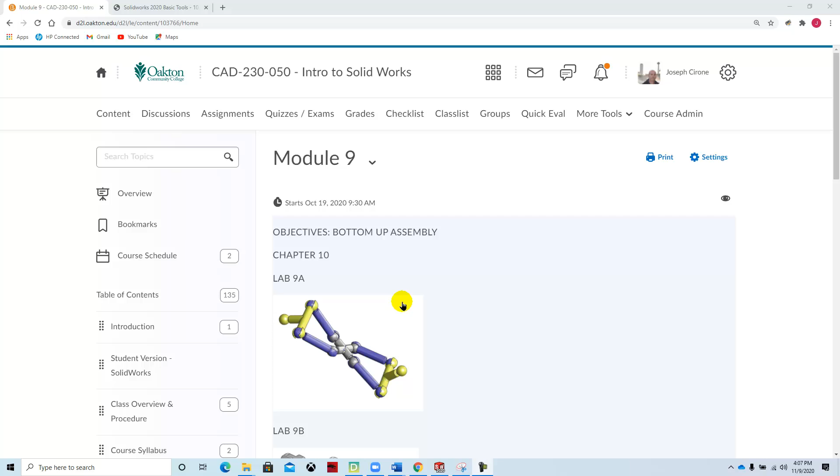If we look at the curriculum, if you want to get that from the book, you can go to the 2020 Basic Tools book, Chapter 10, Bottom-Up Assembly. I've already downloaded the file, so we can take a look at it right here.

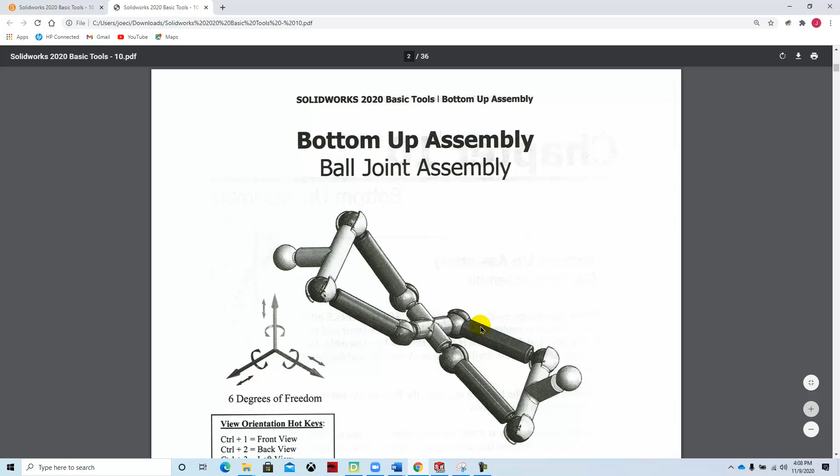Tools needed: we're going to use mates. Mates you can kind of think of as glue, and mates allow us to glue these different pieces together. What mates do is they allow certain movements or certain degrees of freedom. As we start to put things together, we can look at how the parts should move and apply these different mates so that they move within the boundaries of these different degrees of freedom.

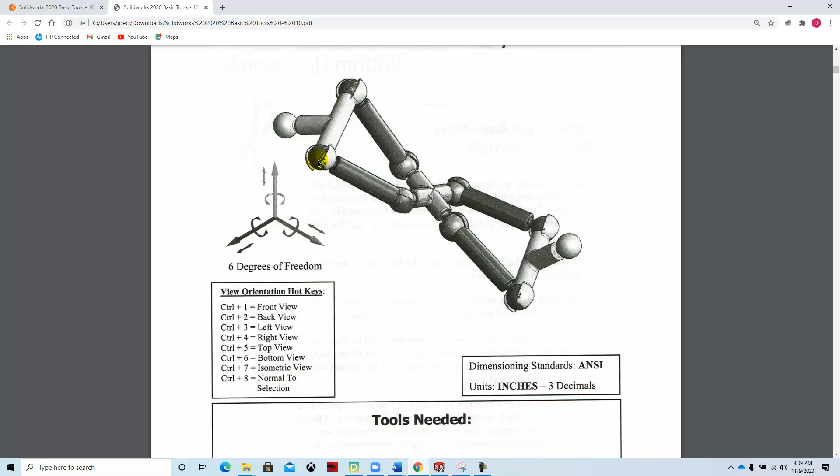Essentially what we do when we mate them is we take away some of their freedom so that they can only move, say for this part, concentric about these spherical shapes.

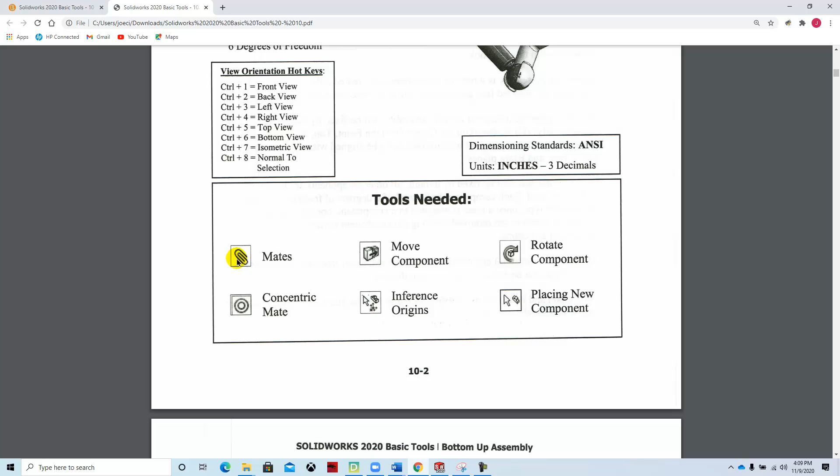This will be an inch or an imperial assembly drawing. Tools needed: we'll use mates, move component, rotate component, place new component, inference origins, and concentric mates.

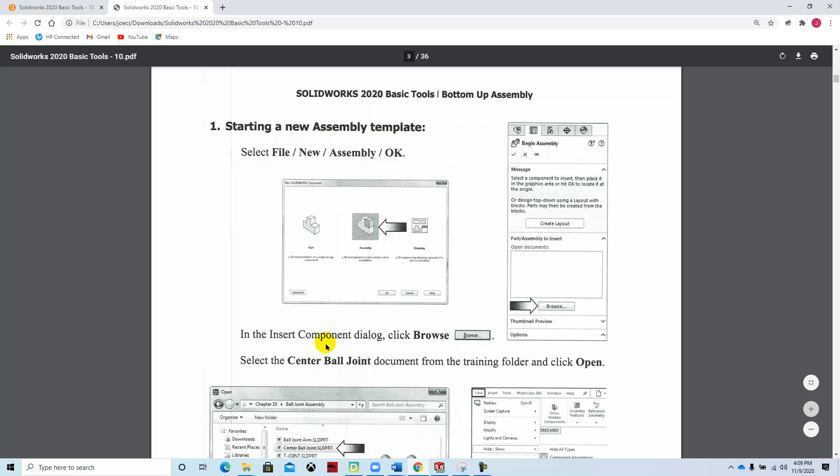Starting a new drawing, starting a new assembly. So what we'll do is we'll go ahead, start a new assembly, and then we'll browse for the parts. Now you should have the parts from the previous chapter. I'll take a look and double check on that. If there are any parts in this module that aren't, I will put them in the D2L course shell in the contents section for this.

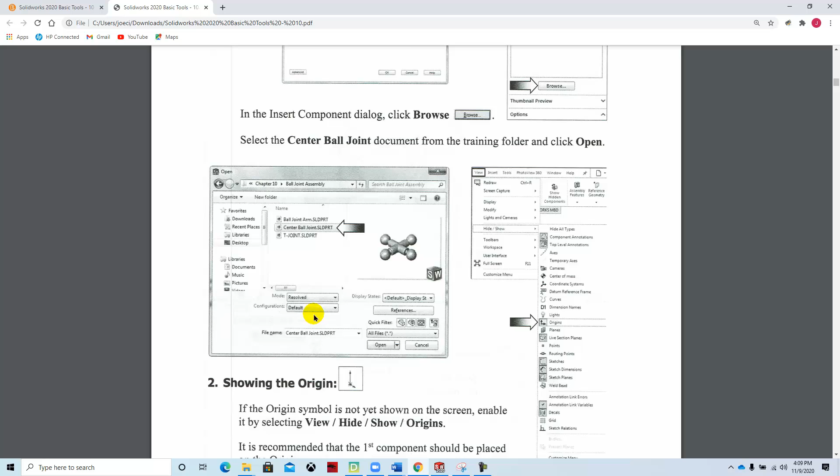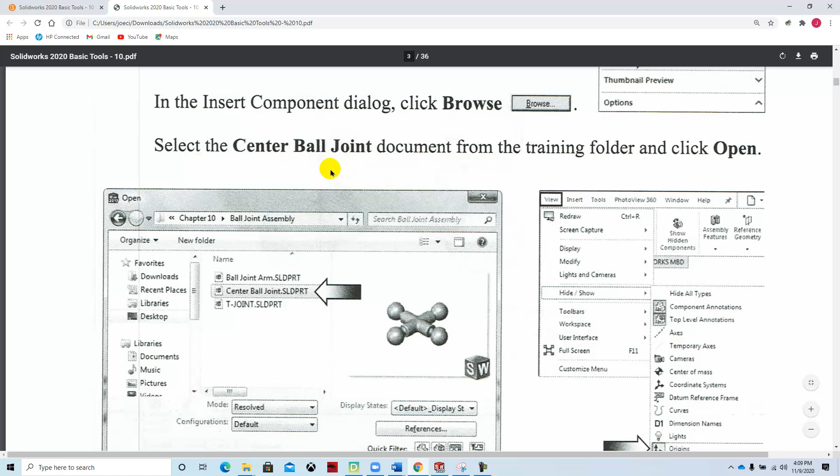So we're going to start off by creating a new assembly, and then we're going to insert this center ball joint. After we insert that, what we're going to do is we're going to display the origin.

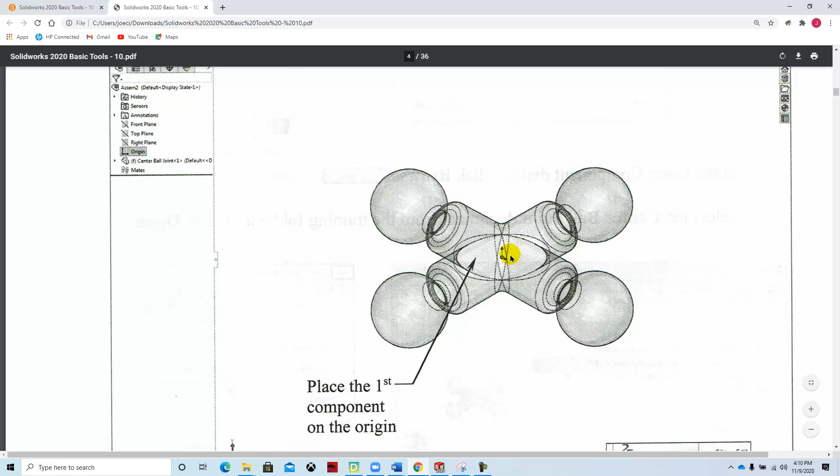What will happen is when we place the first component, it's fixed, meaning it doesn't move, and so there will be a letter F next to that component. So the first part that you put into the assembly is important, and the orientation of that part is also important. So let's get started.

Here's what the assembly will look like. I just did a little bit of practice work on it. Depending on how you move these different components depends on how you've constrained those different parts.

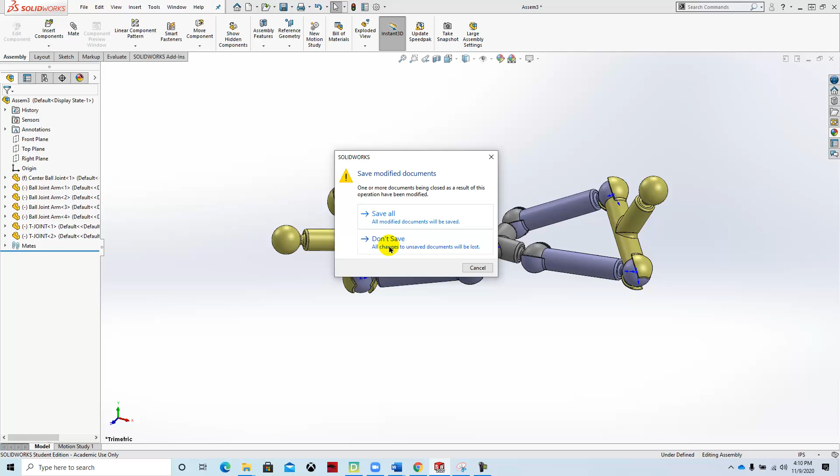I'm not going to save this, just going to bail out of it. And we're going to start a new one. New assembly, okay.

Now it wants to know—it went right into the insert components area, and so it wants us to insert the first component, which will be this center ball. You can browse for it from when you previously did this.

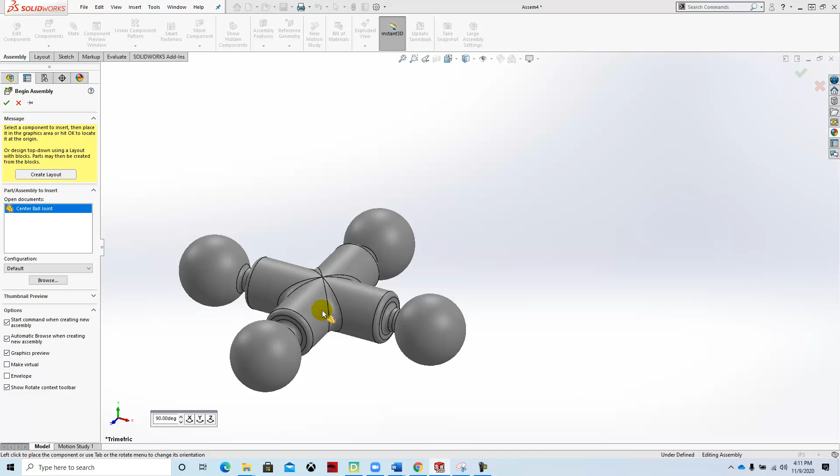And then what it's saying is go ahead and show the origin. It would automatically go to the origin, but the origin is not displayed. So what we can do is go to View, Hide Show, Origins, and this is where zero is. And then when we click here, you'll see that the center of this part is now at the origin.

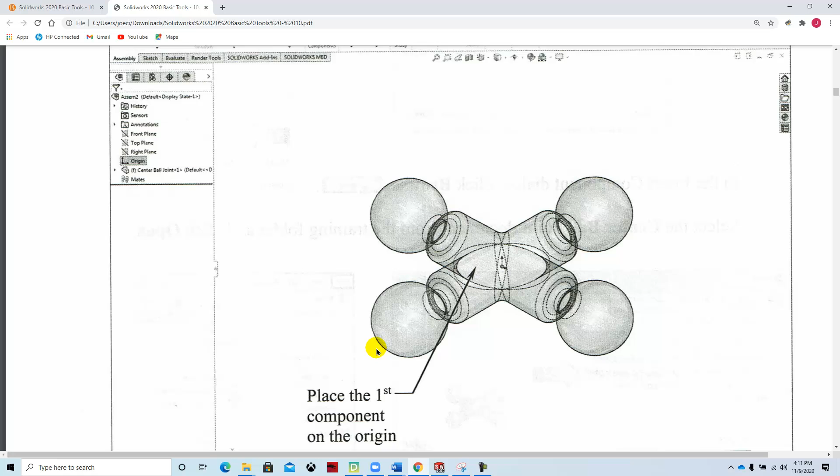And it's fixed. So if we look at the fixed part, we'll see that there's an F next to it.

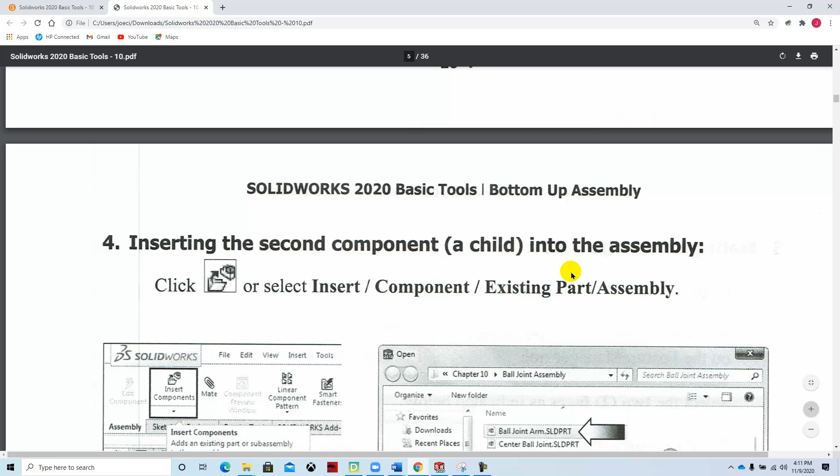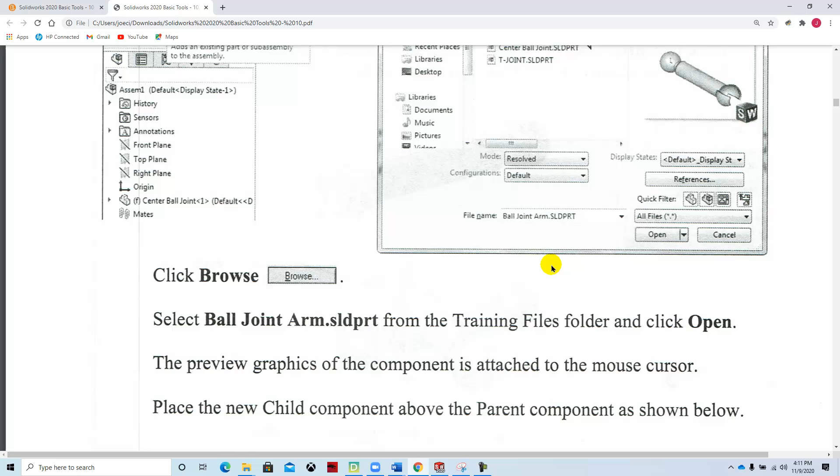We're going to insert the second component, and this is what's known as a parent-child relationship. The first part that's inserted is the parent, and then all the remaining are their children. We'll bring in the ball joint arm, and we could bring in more than one at a time, but the way the book goes through it has you bring one in and mate it. And think of mates kind of as glue.

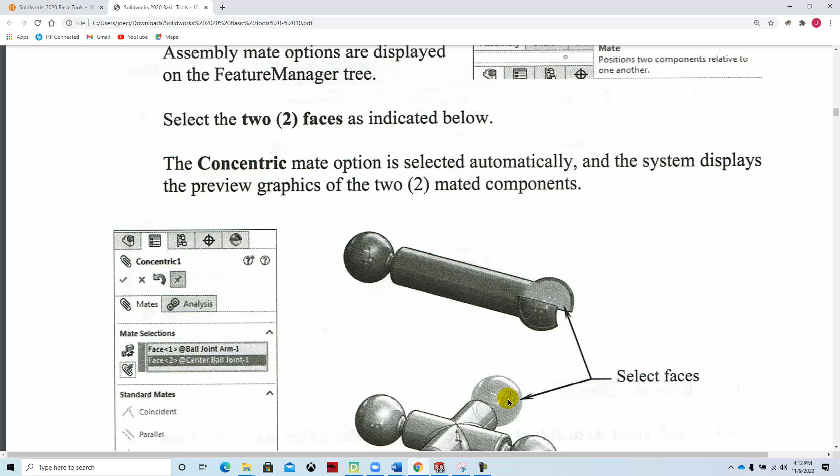And so we'll bring in this part, and then we'll hit the paper clip, and we'll select the inside face, and we'll select the face. And then Solidworks is pretty smart—it'll recommend a concentric mate because it knows there's two spherical faces, and those two mates would work together.

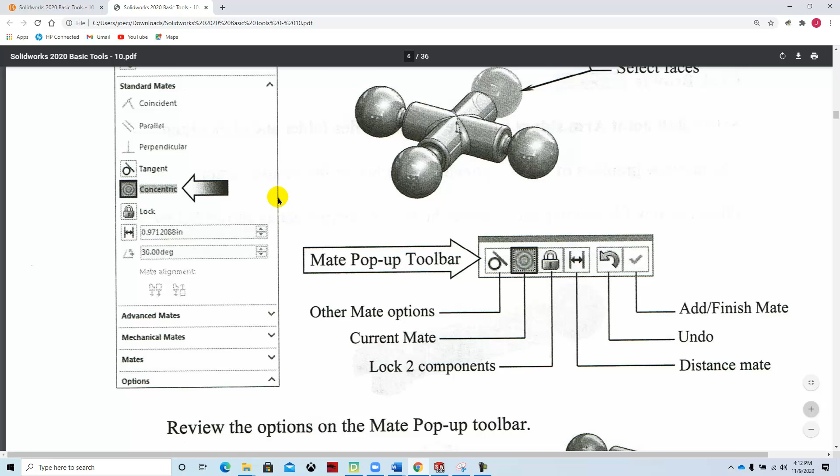And so as we start to mate these things, we can then move them around within the assembly, which is ideally how we make things nowadays. We can actually simulate everything on the screen.

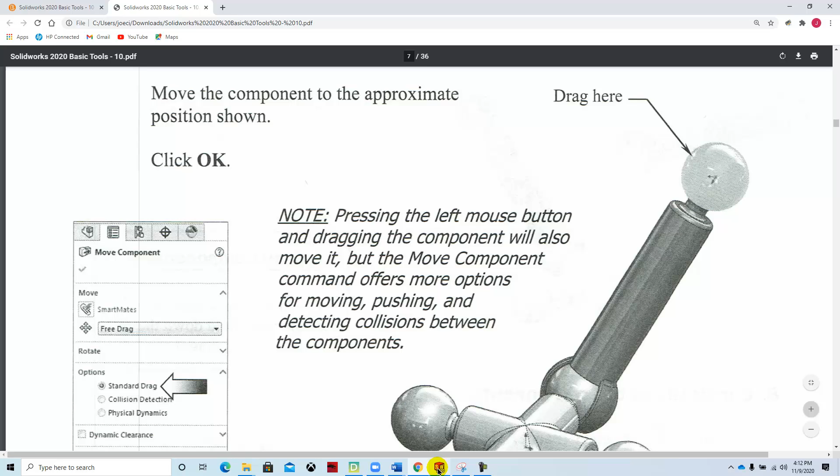Switching back to Solidworks, we can say Insert Component. I can browse, or I can select my ball joint arm, say OK, and then I'll just bring this out here like that.

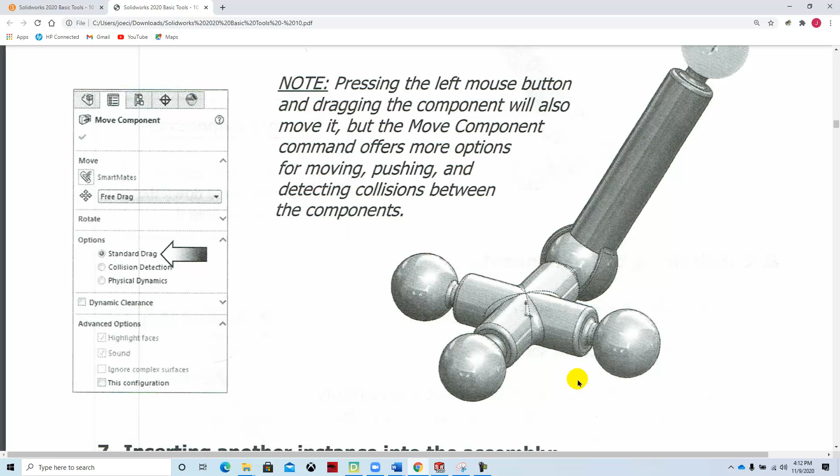We can mate this part to this component right here. It looks like it's at, I don't know, maybe a 3 o'clock position there. So you hit the paper clip, select this face and this one here. It's mated, it's a little turned, so we might be able to rotate it around a bit.

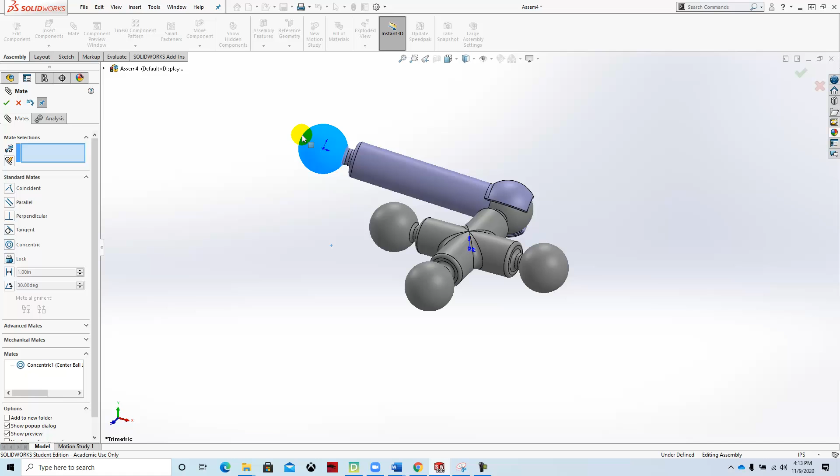Because we haven't taken away all these degrees of freedom yet, because right now we can do whatever we want. We can go right through the part, we can move it. So the only degree of freedom that we have constrained so far is the concentric, meaning it can only move concentric to the other part.

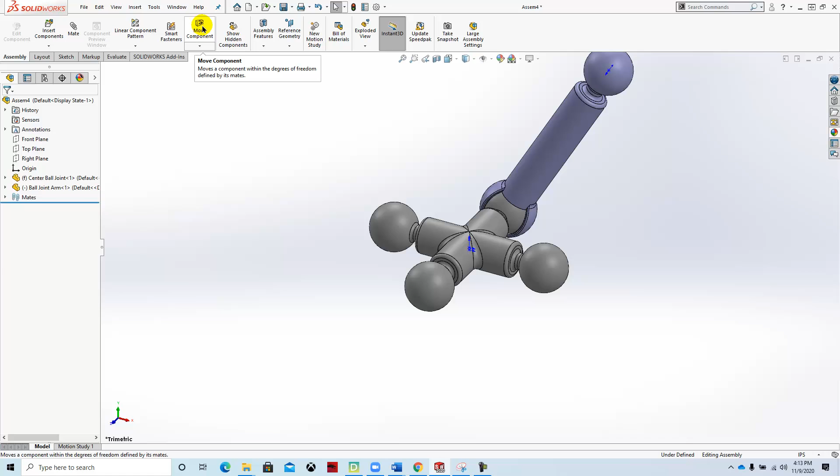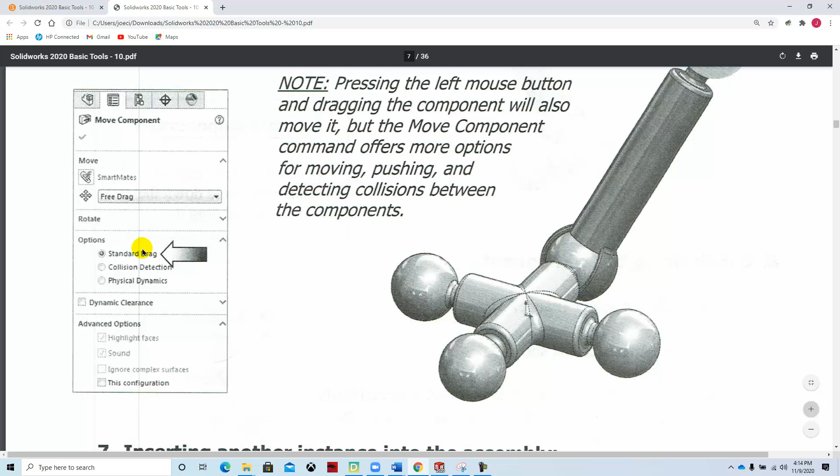Now the textbook actually goes through and says to use, under the assembly, move part or move component. But it does it automatically—you don't have to actually go through and click on the move component to do what I did. So we can move it to this orientation using this standard drag.

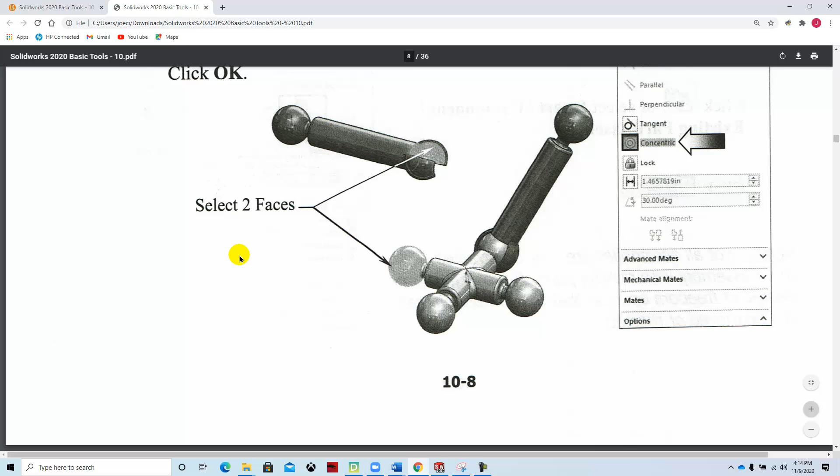And then we'll insert another instance, or another part, the same one, the ball joint arm solid part, and then we'll mate it here. And then we'll do that same technique two more times, here and here.

Insert component, drop it on the screen. You can hold the control key and click on an inserted component and drag off a secondary copy, or a child.

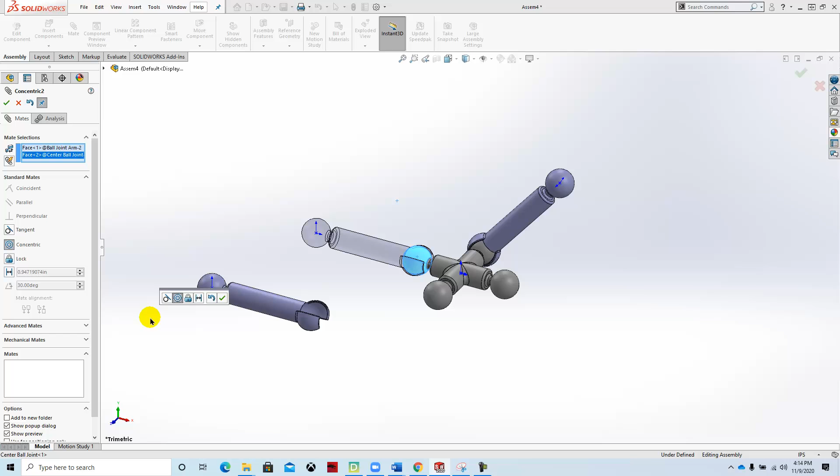And then we can go to the paperclip here and we can mate this to this. It comes up with a concentric mate, which is fine. We'll green check mark that. And then we'll do it again—here to here, green check mark. We can go and we can move the component, and then we can add one more.

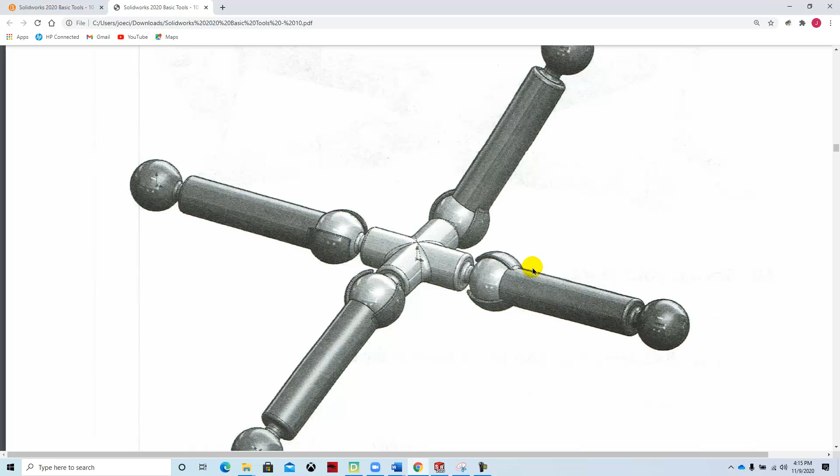Mate. And as you can see, it defies normals by being able to walk through walls. It has kind of a ghosting aspect to it, and it twists and turns. That's the difficulty when you first start working with SolidWorks, controlling these different motions. Sometimes the more you move it, the worse it gets.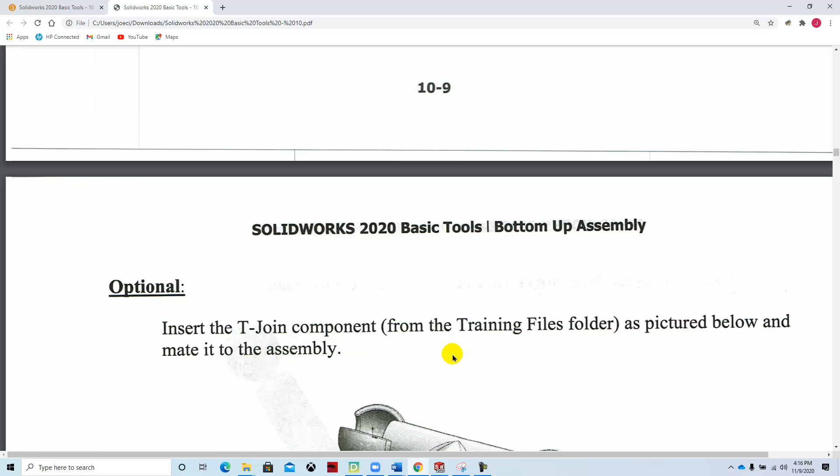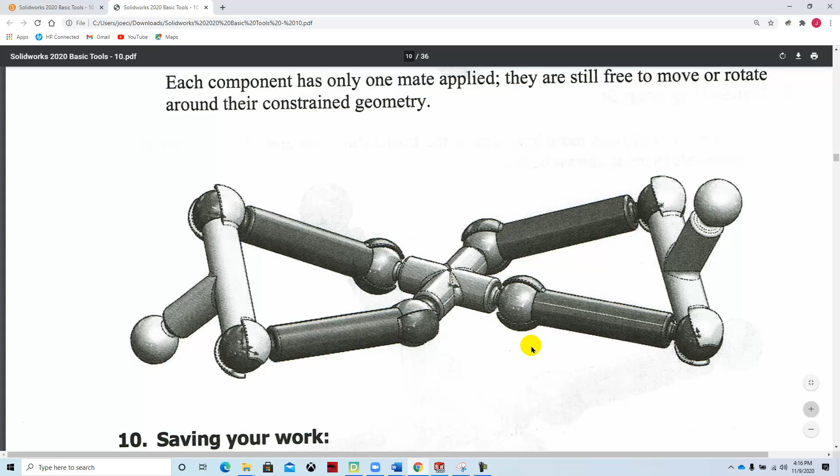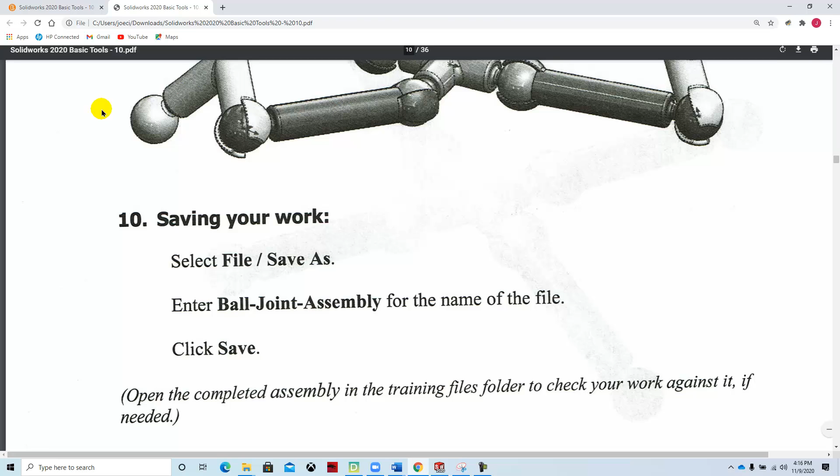So we'll add this T-joint and mate it to these other two components, and we'll put two of those in, then save our work as our initials lab. I believe this is 9A, even though it's chapter 10. So this is going to be lab 9A.

Insert component. We're going to bring in the T-joint, and then we're going to mate that. You want to think about it a little bit as you mate it. When I first practiced this, I was going to mate this one here to here, and this one here to here, and it turned it upside down, so sometimes it can be a little more work. If you think about how you're going to mate the parts before you do it, you can almost position these things how you expect them to be, and it makes your life a little bit easier.

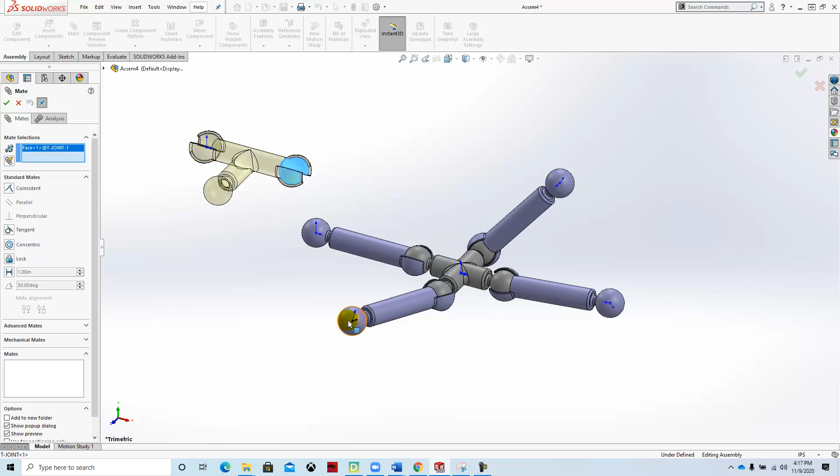So we'll hit the paper clip, get this inside, get this spherical. It'll give us a concentric mate, and we'll green check mark it. Then we'll do it again—it stays in the mate command, it's modal. Insert that component, check mark it, and then you can do some basic motion. Like I said, slowly move it a little bit at a time, because it does have a tendency to go a little crazy on you otherwise.

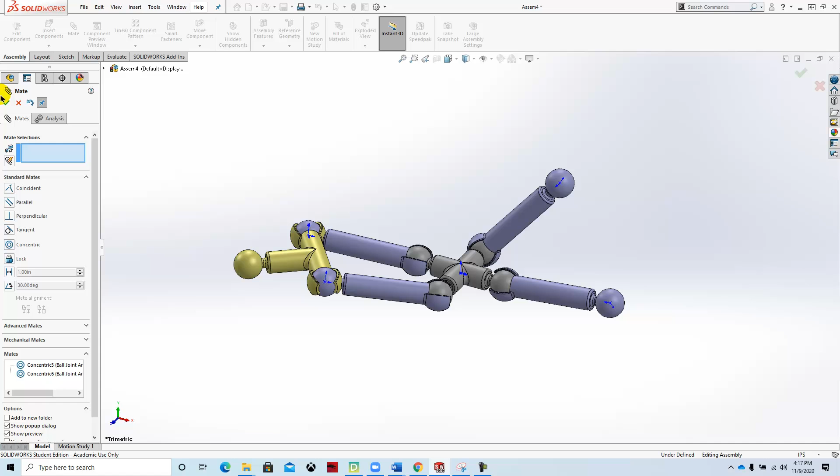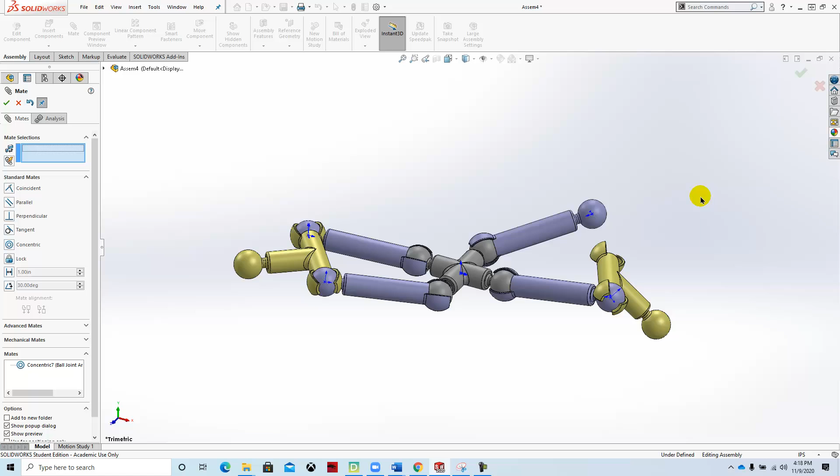We'll insert the other one. Again, as we look at these things, we can use components like rotate component, and we could rotate this component to orientate it the way you think it's going to want to be when it goes together. Same with these, you want to position them to that extent, otherwise it tangles up a little bit. Mate. Green check mark. Change your orientation. Mate. Green check mark. Green check mark. Okay, save the file.

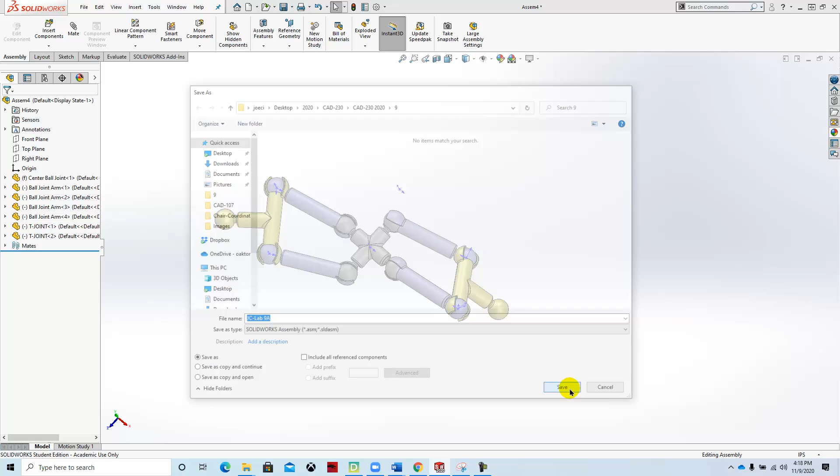Now the thing about SolidWorks when you create these assemblies is that it's a parametric program, and the reason it's so popular in manufacturing is because it goes out and finds these parts. This assembly is made up of three different parts—this part here, these parts here, and this part here. So when we save the assembly model, the location of the components is important because it maps to where you saved those files. The way I keep my parts organized is I create a folder called Lab 9, and I put all the components for that there. Now if you turn that in, or give that file to somebody else and that same directory structure is not there, you'll get an error because it won't be able to find the parts, since the file structure isn't the same on a different computer.

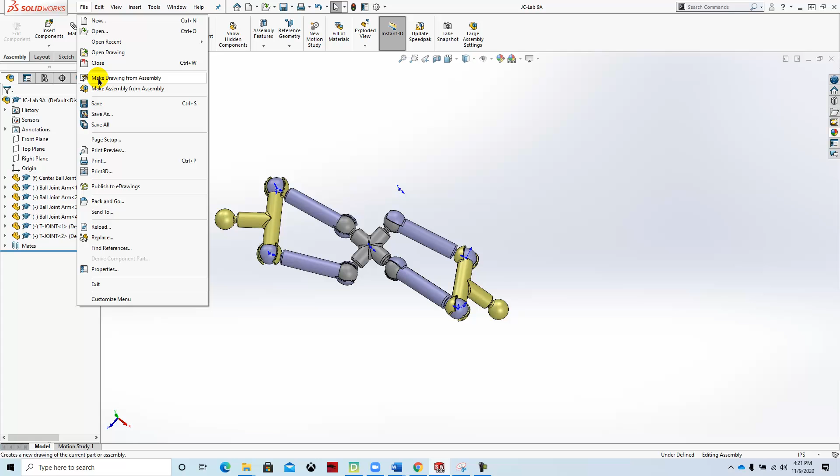So the way around that is to save the part as Pack and Go. You can say File, Pack and Go, and what Pack and Go will do is create a zip file of all of these files—it knows where they are already. So we can go ahead and say that's fine, and we'll save.

What I'm going to do is browse to my location for this file, which has a directory structure called 9, and I'm going to save it here. Apparently it just needs the folder. There we go, and then we'll hit save. And yes, yes, yes, yes. That will create a zip file within that folder, and then we can take that zip file and turn it in to our D2L.

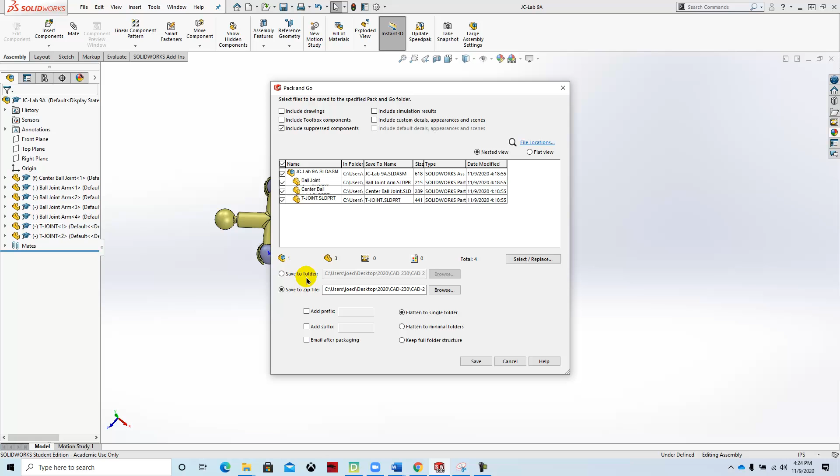I have an error in my video, so I'm going to correct it here. Rather than saving it to this folder, we're going to save it to a zip file—I did not check the correct box here. So when I save it, I'm going to browse to my 9 folder and hit save. I'm going to name it my initials dash lab 9A, and this is going to be a zip file, so I'll hit save, and then save again. That will create a zipped file folder of all the components, and that's what you should turn in to the Dropbox.

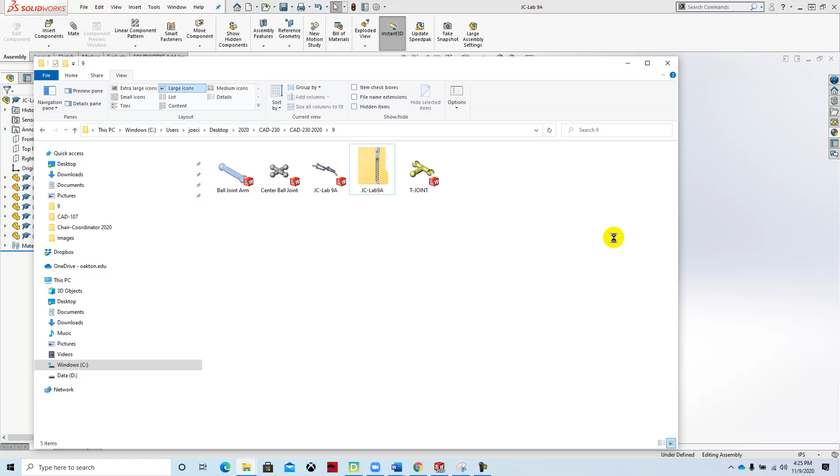So you should take that pack and go file, click on it, right click, copy it, and then paste it into the D2L assignments folder. The other thing you might want to do is create a PDF of the assembly, and we'll talk about that in the next video. Okay, this ends the video for Lab 9A.